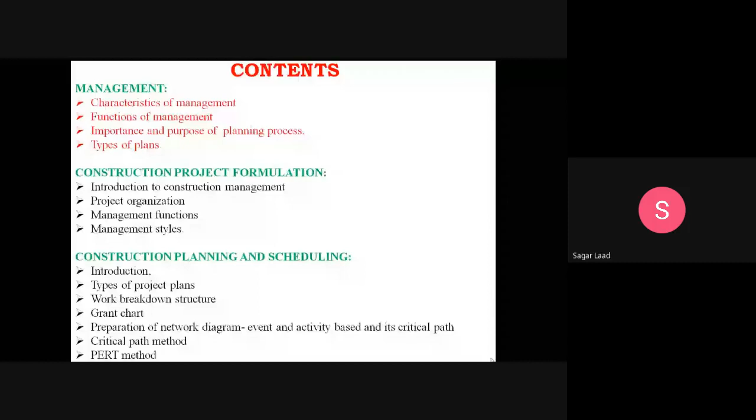Okay, the slides are visible now, right? Can anyone please confirm the content slides are visible? No sir, can't see sir. Yes, yes, few visible. Now we can see it. Visible, right? Yes, yes, yes, sir.

Fine, fine. So in the previous class we have completed the first part of management, that is the first part of Module 1, which starts with management - characteristics of management, functions of management, and the major importance and purpose of the planning process, and the different types of plans. We have also studied the nature of planning.

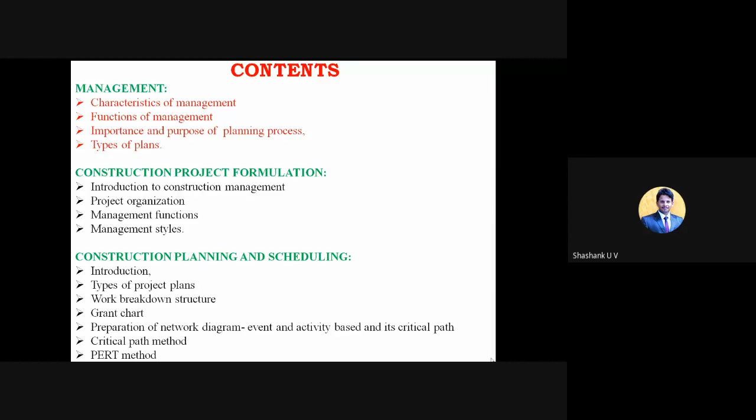And now we are moving to the next concept, that is construction project formulation. So again it contains the basic introduction about construction management - what is construction management, how it is related with the management process, and then how it is going to work out in a particular project work, project organization, management functions, and then the different management styles. We'll study one by one now.

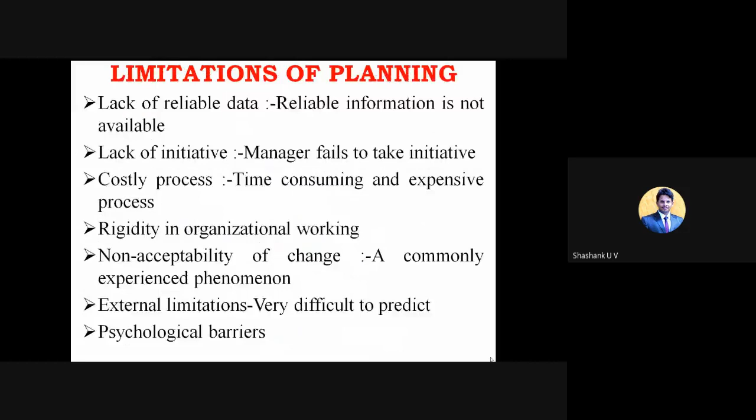So in the previous class we have discussed till now.

Project management basically defines that it starts at the right pace, but as it proceeds these activities will get off the schedule because of various tribulations. Project management is a straight path which contains so many stages, such that since from starting till end it is going to be divided into various aspects, such that proper planning has to be provided with respect to proper scheduling. So it directly affects cost as well as time.

So here, certain activities what we have planned in the initial stage of the project are going to get off the schedule because of so many uncertainties, because of various tribulations like improper planning, uncertainties, non-delivery of resources on time, execution delays, environmental factors, and so on.

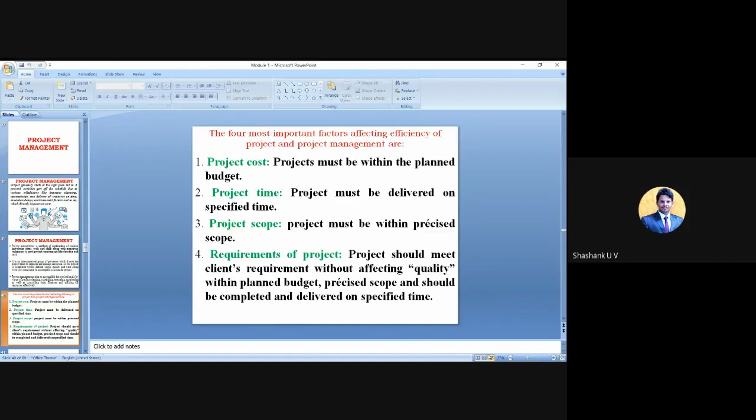Okay, so moving on to the next part, here you can see there are four most important factors which are going to affect the efficiency of the project and project management. They are: first, project cost; project time; followed by project scope; and then requirements of project work.

The first one is project cost. This project cost is defined, or fixed, before starting the project work. This cost is decided by the client itself, so the client is the major source of that project cost. As per his requirements, with respect to cost or time duration, we need to work on that, meaning we need to fix some boundaries. If those requirements are within those boundaries, then we can easily complete this work.

In that first aspect, project cost, projects must be within the planned budget. In the planning stage only you will come to know the total cost or total budget of the project, so at the end of the project work, the project cost has to be within that planned budget. For example, if you have planned a particular construction work for 2 crore rupees, at the end of the project work it should be within that, because that defines the height of your planning.

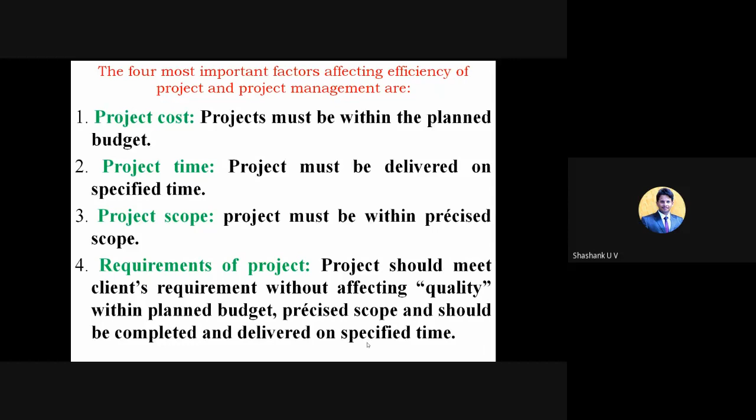These aspects can be achieved only by adopting project management. So this plays an important role in project management.

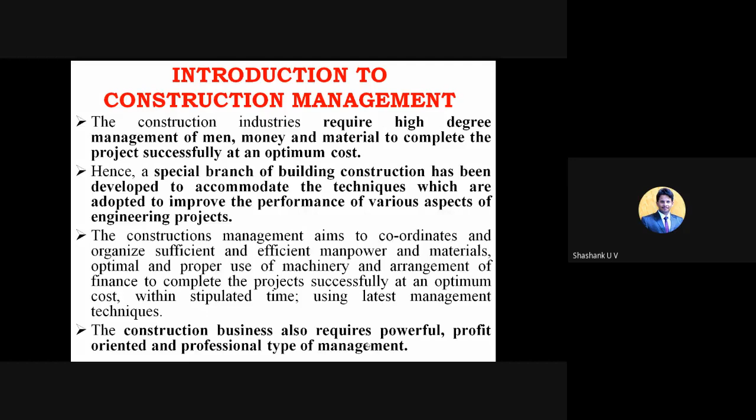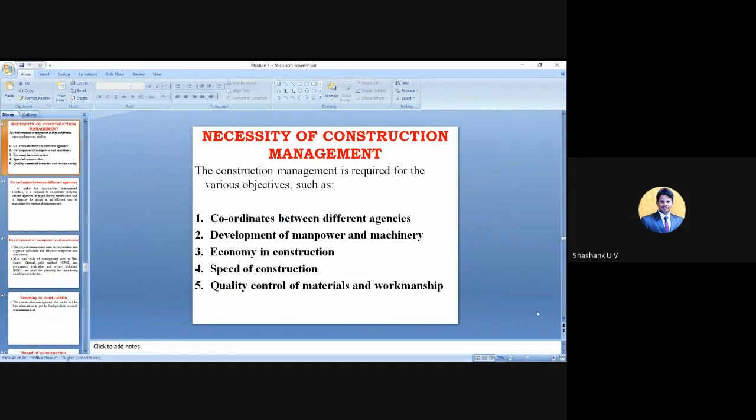So why do you generally require construction management? What can it do? What are the uses and necessities of construction management? The construction management is required for various objectives.

One objective is coordination between different agencies. As a client, you can't reach every availability of resource places, so instead, construction management will visit all the places where resources are available, contact the different agencies, and choose the best materials with respect to quality as well as cost.

The construction management team will have better communication skills and contacts, so that whenever they require resources at the right time and place, they are able to get them. By adopting construction management, we can achieve the best development of manpower and machinery in the construction work.

Another objective is economy in construction. When we adopt construction management, the economy of construction will be in a better way, meaning we can save the cost whatever we planned at the initial part.

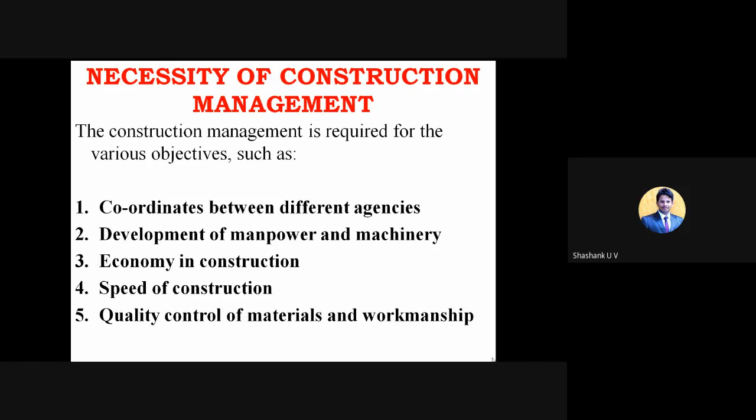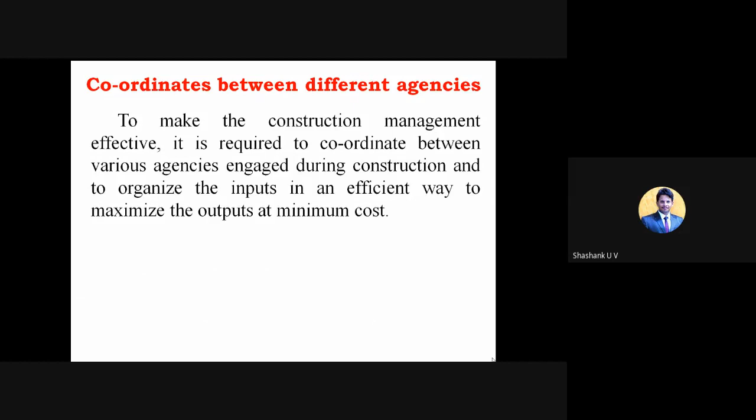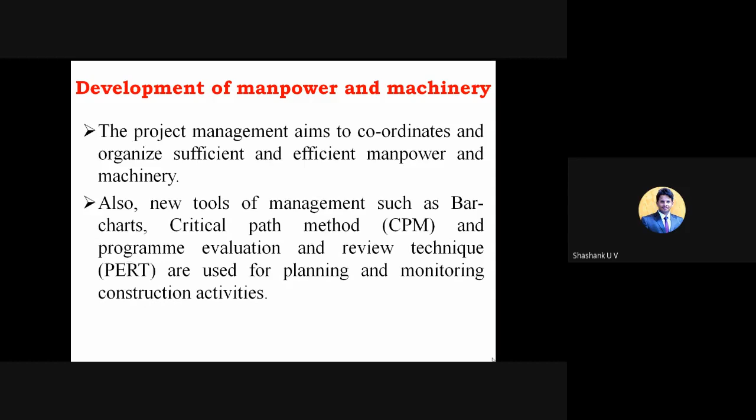That is whatever we have explained till now, coordination between different agencies, so that we can choose the best materials at the right time and at the right cost. The development of manpower and machinery directly defines the total cost as well as the total duration of the project, meaning construction speed, and quality control. So these are the main objectives of construction management.

Following are the objectives of civil engineering management, specifically with respect to construction. The work should be properly planned and organized. That is what till now we have discussed, what we can achieve by adopting construction management.

The work should be completed within the specified time and estimated cost. This is purely achieved based on experience, so the work gets completed at the specified time and estimated cost.

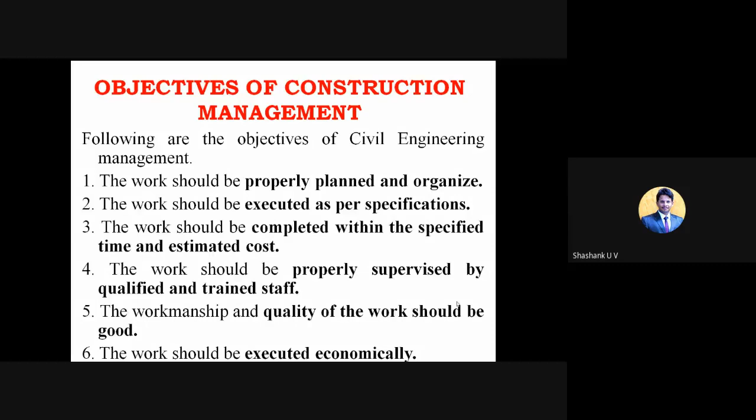The importance of construction management and more we will study in the next class.